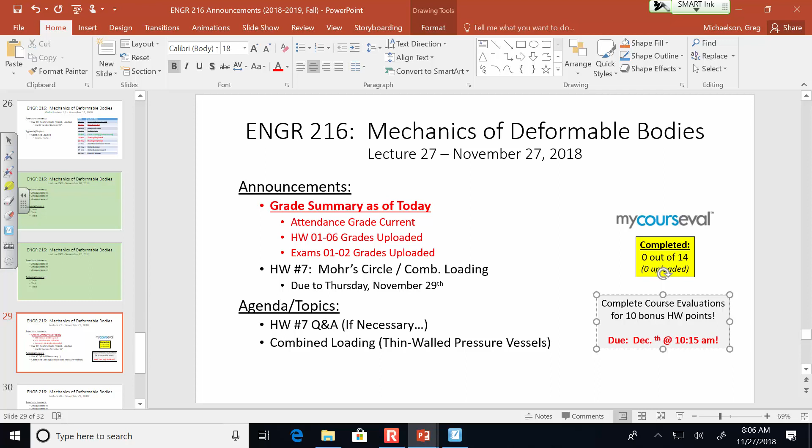Yep, that is correct. It is December, I think December 13th. December 13th. Thank you. That's going to bug me as well.

Okay, so homework number 7 is due Thursday. I'm going to assign homework number 8 on Thursday. It's due the following Thursday, and then that's it. Everybody okay, clear on homework schedules?

Now, as for the exam, it's on December 13th, that's Thursday. I have here due 10:15 a.m., but our exam is at 8, right? I think it's 8, so I'll check. It's in the syllabus. I checked the exam schedule when I made my syllabus, so it should match, because I have one exam Monday at 10:15, and then it's Thursday at 8 a.m. That's when our exam is, so it's Thursday, December 13th.

Okay, so homework 7, homework 8, the exam. Let's talk about this bonus assignment.

So I don't know about other professors, but I take the course evaluations kind of seriously because I like to see the feedback, and I'm always trying to improve.

So I'll give you a story. I told this story yesterday to my structural analysis folks. My first semester here when I taught steel design, I was using PowerPoint slides with a dark blue background, and when you printed them out in black and white, it was gray, a dark solid gray. You take a pencil and write on them, you can't read it because of the dark gray background. So I was looking through my course evals, and everybody was saying you've got to change the background, we can't write on anything. So the theme I use now with the green lines and the Marshall logo, that's why I use it, because otherwise I'd probably still be using that blue background. The point I'm trying to make is I do take this stuff kind of seriously.

We only have one more combined loading scenario to discuss, and that's thin-walled pressure vessels, because they are a special case, if you will.

Let's lay it out. What I'm talking about with a thin-walled pressure vessel is probably, on its face, going to be a more attractive topic for you mechanical engineers in the room, because we're talking about storage of fluids, gases, what have you, at either high temperatures or high pressures. That's a mechanical engineering aspect if I've ever heard one.

There are actual applications of thin-walled pressure vessels in civil engineering as well. For those who take reinforced concrete design, when we look at spirally reinforced circular columns, we size and detail the spiral reinforcement assuming it's a thin-walled pressure vessel containing the column. You've got this compressive load on a column, the internal column wants to crack and burst, and the spiral reinforcement keeps it contained. It's kind of the same thing.

Now, a couple things about this derivation: you're going to see these formulas and they're really simple and straightforward. What we're talking about is a vessel. We assume it's cylindrical in nature, so it's a long, circular tube, and it's subjected to some sort of uniform internal pressure on its inner surface.

One of the things we're doing in our analysis is assuming that the walls of this cylinder are essentially thin. What I mean is you're not getting a variation in response from this side of the surface to this side. In other words, we're basically assuming the stresses and strains are uniform along the wall of the cylinder.

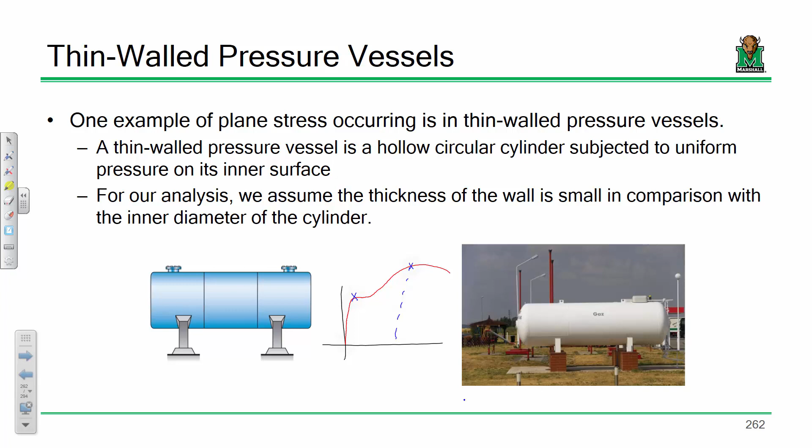Random tidbit, random factoid, but that's all I got. I just think that's kind of cool. It's called autofrettage, if you ever hear about it. So Google it, Wikipedia it.

It's cool stuff. Okay, so what we're doing in this derivation is I'm ultimately trying to determine the stresses on a thin-walled pressure vessel that's subjected to internal pressure.

Now, this is pretty simple to understand conceptually if you think about it. You got a balloon, right? Take the balloon, balloon expands. What type of stress is the balloon experiencing? Think about it. Let me ask it simply: is it experiencing tension or compression? Take the balloon, what happens to the balloon? The fabric of the balloon is being stretched, right?

That's the same thing here. You have a pressure vessel subjected to an internal pressure. The pressure vessel is wanting to expand, but it's not — it's containing that pressure. So it's going to experience some tension. If you look at a stress block in a pressure vessel, here's your stress block, what you end up seeing is here's a sigma 1 and here's a sigma 2. You end up seeing a stress block that experiences nothing but tension. So your principal stresses are really easy to determine.

Once you get sigma 1 and sigma 2, you can determine tau max pretty easily. So that's really sort of the long and short of what we're doing, is we're trying to determine sigma 1 and sigma 2. Okay, so I have here a section of a cylinder, right?

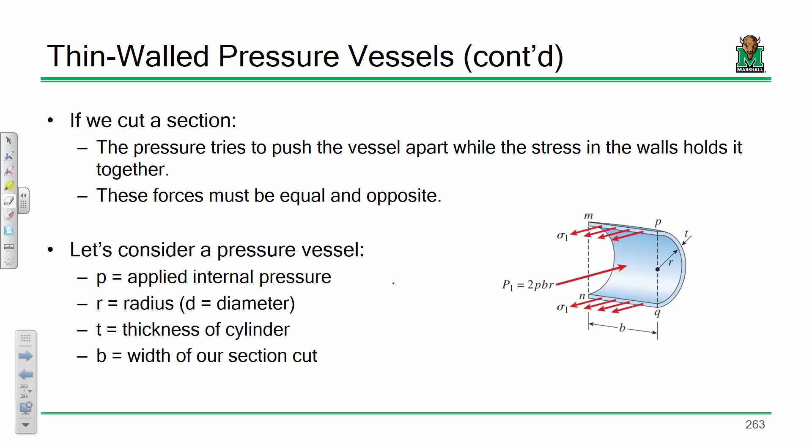Now, for those of you who've had a course in fluid mechanics, or if you've talked about pressure a little bit in any of your other classes, you might be a little confused right now, because if you go back to the balloon analogy, if I blow up a balloon, the pressure doesn't just act one way — it acts every way. You have a pressure vessel or balloon or anything, and you have some internal pressure inside that structure. The pressure is going to act perpendicularly everywhere, because it's going to try and force the whole thing apart.

Well, what I've done in this particular section cut, because I'm trying to determine the amount of stress this way, is I'm cutting a section and I'm only looking to the right. It doesn't matter, I could look to the right or to the left, it doesn't really matter. But the reason why I'm only considering pressure that's acting to the right is because if you cut a section and look to the right, everything that's going up is canceled out by everything that's going down. I've got some amount of pressure going up, some amount of pressure going down, all that gets canceled out. The only thing that doesn't get canceled out in this equilibrium scenario is pressure going to the right.

Well, where does that go? It's resisted by some stress inside the pressure vessel acting to the left. So when I cut a section, all I have to consider is pressure acting toward the right, because that's counteracted by the cylinder generating stresses to the left. Everything going up and down is canceled out internally. Does that make sense from an equilibrium standpoint?

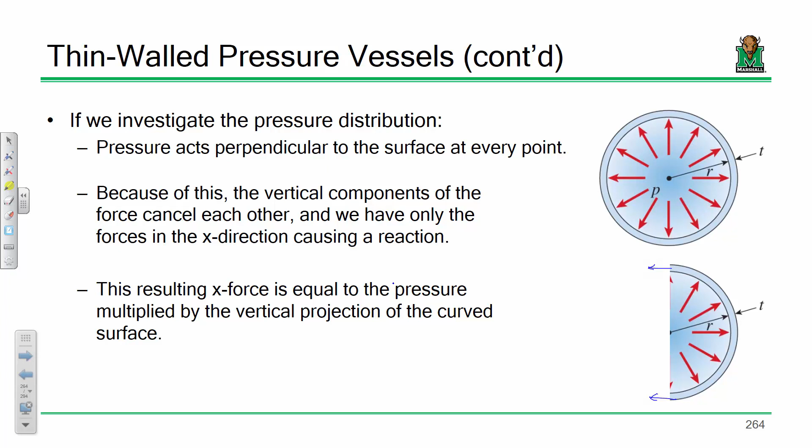But with this, because you have stresses going in all sorts of different directions, we can say everything going up is canceled by everything going down, but that doesn't address things going to the left or right. Sound good? Okay.

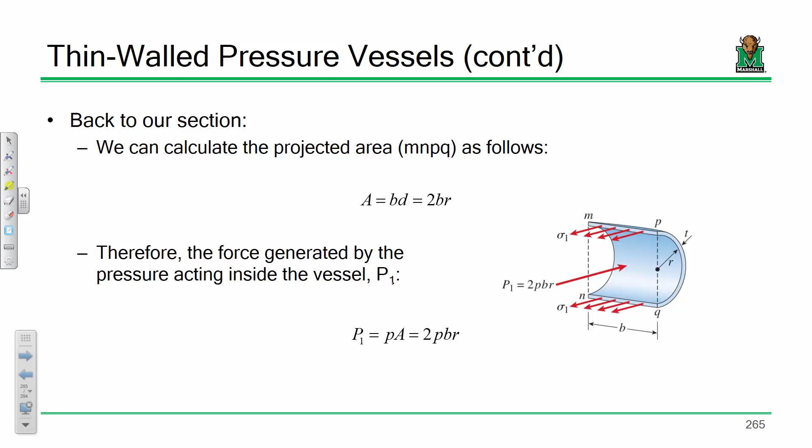Now here's our section. So how do we determine the pressure, the area, and the force? What is this area? Well, this area is the width times the height. The height is 2 times the radius. So this area times the internal pressure, that's the force. Force equals pressure times area. Sound good? So take that force and divide it by the area of the cylinder.

Now what's the area of the cylinder? Well, it's the area of this little metal strip here and this metal strip there. What's the area of that metal strip? Down here it's B times the thickness, here it's B times the thickness, so it's 2 times B times the thickness. Take force divided by area, there's your stress. That's simple.

So I propose that one of our principal stresses is PR over T - the pressure times the radius of the cylinder divided by the thickness. That's simple, I told you this is really easy. This is a really easy formulation. Okay, now that is stress this way.

So let's say here's my pressure vessel. That's stress this way, like we sometimes call it hoop stress. That's stress along the circular direction of the cylinder. But what about this way? There's also stress acting this way. Think about it like this - if I'm subjecting this cylinder to internal pressure, I propose one of two things is going to happen. Not only is it going to want to get wider, it's also going to want to get longer, right? Imagine the clown with the balloon going like this, it wants to get longer. Well, same thing here, okay?

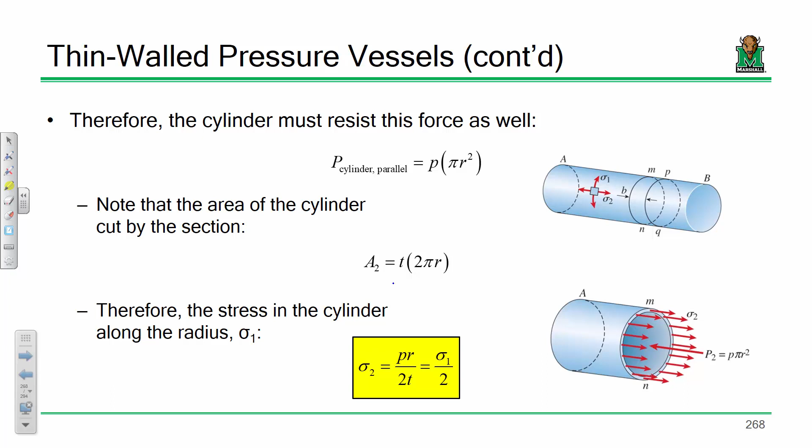Any questions? Okay, let's look at an example.

Our derivation assumes the ends of the cylinders are flat, so it's a cylindrical cross-section. There are derivations you can look up for spherical ends, conical ends, or other shapes - it's not that difficult to find.

Have you ever heard of a Roark's stress guide, if you've worked in the field? Go to any mechanical engineer who's been practicing for 10, 15 years, or even a structural engineer that long, and look at their bookshelf - more often than not you'll find a Roark's stress guide.

A Roark's stress guide is a book about yay thick, and it's got all these different stress formulas for really unique scenarios - like the stress on an angle bracket with a hole in it, or a cylinder with a convex end, something weird like that. There's oodles of tables for stuff like this. What we're doing is fundamental stress analysis, but if you have anything with really weird geometry...

I'd suggest one of two things: if it's somewhat standard, you may find it in something like a Roark's stress guide. Or if it's that funky, break out the finite element analysis - ANSYS, NX, or whatever software package you want - and determine it accordingly. So the short answer is yes, there are derivations for other geometries, but I'm not worried about that here. As long as you understand the general concepts, I'm good.

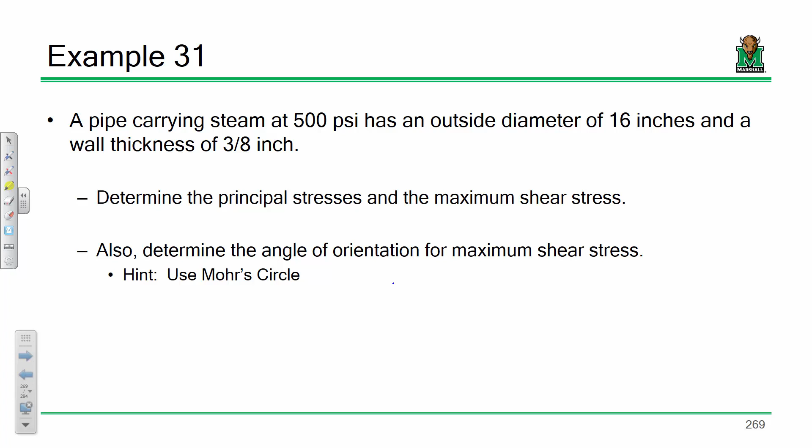Okay, so we have an outer diameter of 16 inches and a thickness of 3/8 of an inch. Right off the bat, how do we determine an inner diameter? Anybody remember? Take the outer diameter and do what to it? Minus 2t, there we go.

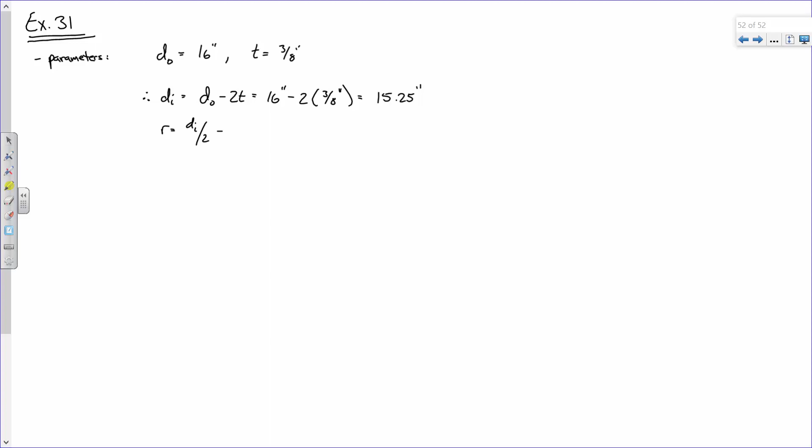Okay, and that comes out to be 15 1/4. The reason we need that is because we define the radius as the inner diameter over 2, so that is 7.625. We also have our internal pressure of 500 psi.

If you have that, you can determine your sigma 1 and sigma 2 very easily. Sigma 1 is PR over T. That's 500 psi, R is 7.625 inches, and T is 3/8 of an inch. What does that come out to be?

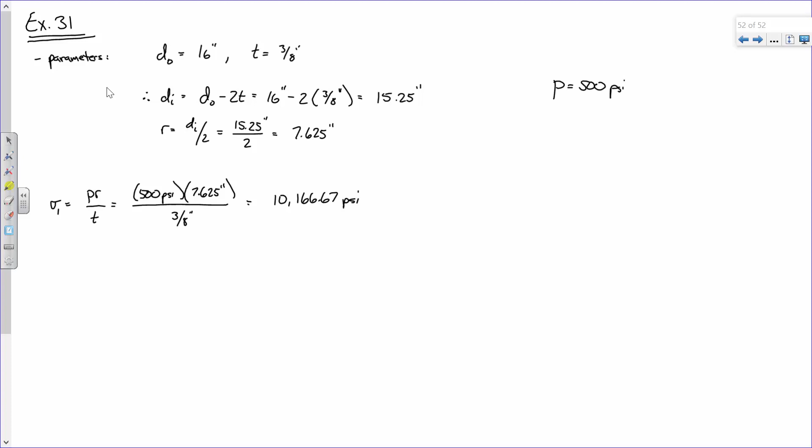There we go. What are the units? It's a stress, so it's PSI. Keep it simple - look, you have PSI multiplied by inches over inches, the inches cancel, so it's just PSI.

Now, I'm lazy, so you could say sigma 2 is PR over 2T, but I'm lazy - that's just sigma 1 over 2. So that's 10,166.67 PSI over 2.

So here's what I propose: for this pressure vessel, we have a stress state where we have a positive 10,166.67 psi for sigma x. We have sigma y, which is 5,083.33 psi. And we have a tau xy, which is 0, because again, it's a pressure vessel - it's like a balloon blowing up.

We're stretching on it, but why am I saying tau xy is 0? Think about it - when you blow up a balloon, is it doing that? No, it's just whoosh, it's just experiencing normal stress.

From these, what can we compute? What is sigma average? How do we do that - remember? Just that plus that divided by 2. The tau xy is the shear stress. So sigma average is 7,625 PSI. Do I have a second on that?

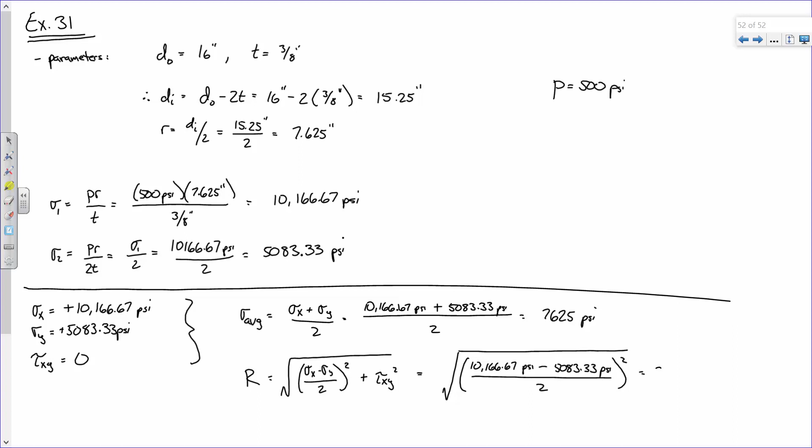Second on that? All right, so from these we can determine a few things. We can determine sigma 1 and sigma 2. Some of you might have a little bit of a confused look on your face, and that's a good thing. And you'll see why.

So what is sigma average plus R and sigma average minus R? What's the first one? What about the next one? There you go.

In other words, our derivation - and I sort of wanted to wait until you saw it - but when we derive these right here, these are principal stresses. And I'm going to put a caveat on that: if no other stresses are present.

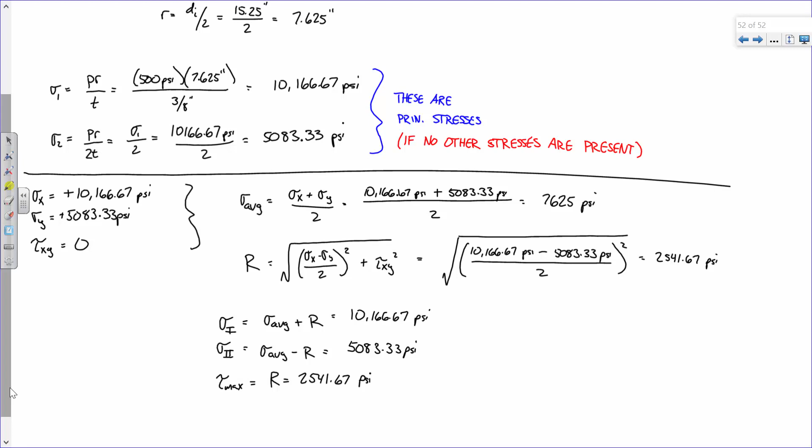Now the only other thing left to determine on this problem is your principal orientation. Does anybody remember that formula? Well, you've got your notes.

There you go. Now, without doing any math, tell me what that comes out to be. Well, you have to do a little bit of math - you can probably do it in your head. What is tau xy? So what's the inverse tangent of 0? 0.

Boom. Again, when you have a pressure vessel, go back to the balloon scenario. When you blow up a balloon, is it doing that - is it like shearing? It's not. Anytime you have a pressure vessel, if all there is pressure, you're going to have a sigma x and a sigma y, but no shear.

No, I'm saying what if you took the cylinder and twisted it, or sheared it? Then you'd have a shear stress. Which is possible - imagine you've got the clown blowing up the long balloon. Then you take that balloon and you twist it. Now that balloon is subjected to shear stress.

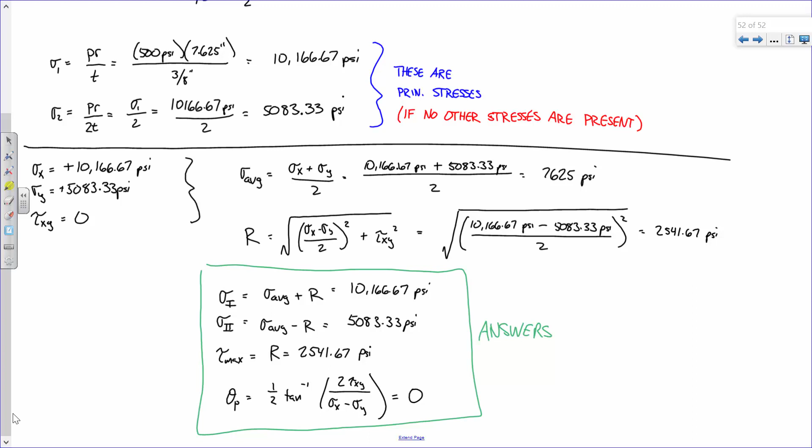Any other questions? So I guess if it's a cylinder, does it really matter if the angle is different? Like if it's a cylinder, at principal angle, it doesn't matter what it is, right? It only matters if you're using a material that has a particularly weak capacity in shear.

It's possible. Look, you look up a material - let's say you're using some grade of aluminum, and that might have an allowable normal stress and an allowable shear stress. So depending upon what those values are, these may be fine, these aren't. That's what I'm saying, it just depends on the material you're using.

Did I convince you? I feel like I didn't. Well, I'm talking about the angle, not necessarily the PSI, like that principal angle of orientation. It would only - all right, how about this, the best way of answering that is: if you had other stresses, then you would need to determine that angle. I'm saying if all you have is internal pressure, then the answer to your question is mostly correct, yes.

But if you have a shearing or a torsion or a bending or something, then that angle isn't going to be zero, because you're going to have these values not necessarily be these, and then you might have a shear stress. Sound good?

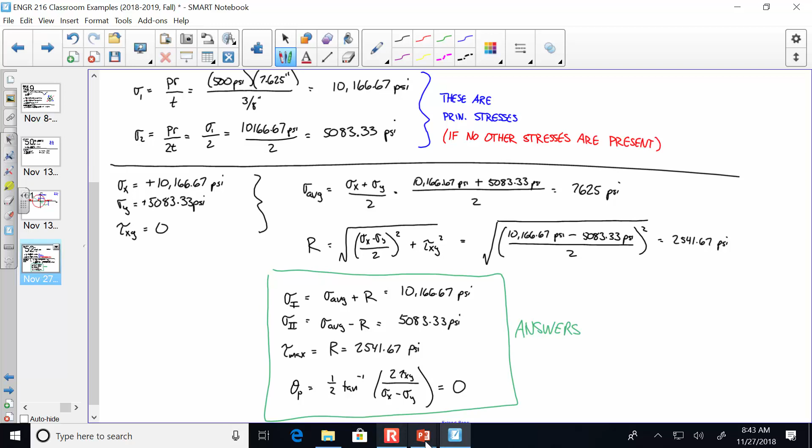All right, since we got time, I'm going to use that time. We're going to talk a little bit about our last topic, and here's why. I'll make you a deal: if we can get through buckling today and Thursday, we'll cancel class on Tuesday.

Are you sure? I'm sensing some doubt. Let's talk about buckling.

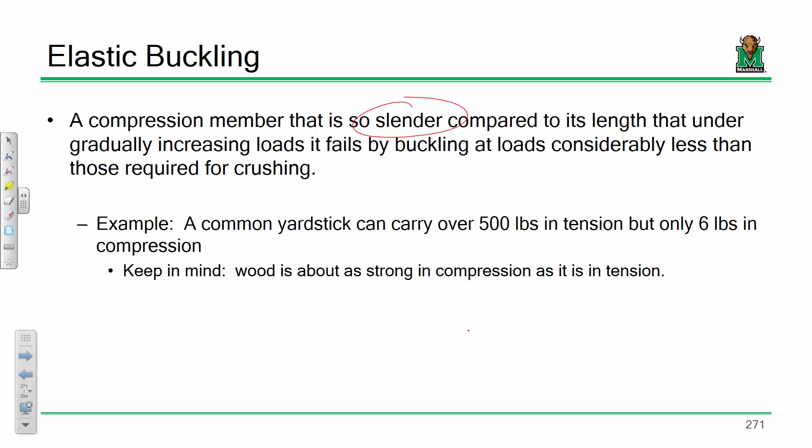For you civil engineers taking steel design with me next semester, the concept of slenderness is something we're going to spend a long time on in steel, because how you handle slenderness in different directions—you've got to hike up your pants and know what you're doing.

Now, stability-related failures can happen for a number of reasons. For instance, thin-walled cylinders subjected to external pressure. What if you have a thin-walled cylinder subjected to pressure externally? How many of you have crushed a Coke can? That's what we're talking about.

What about compression flanges in beams? What if you're talking about a beam that's being bent? Anytime you have a beam, some of it's experiencing compression and some of it's experiencing tension. So maybe the beam will want to buckle.

This is just a few, but there's oodles and oodles of different ways that an element can buckle. Sometimes if you're doing just an elastic stress analysis—how many of you mechanicals did stress analysis with NX? Did you all do that? You built a part and then ran the stresses? Well, you run a stress analysis, or for you civil engineers, if you run a RISA analysis, all it's doing is just giving you...

...the compression in this truss member and all this, but it doesn't answer whether or not that member is going to buckle. So the stress analysis we've done up until this point will give you stresses, but it doesn't consider the concept of buckling. Considering buckling, you can have a much worse scenario. The stresses can be a lot worse.

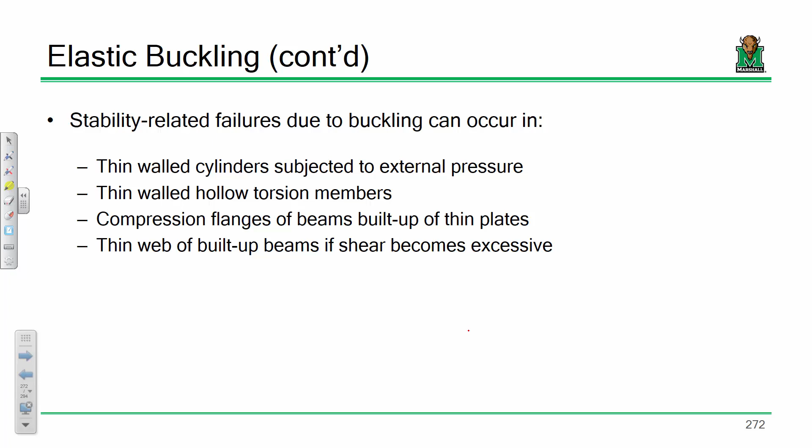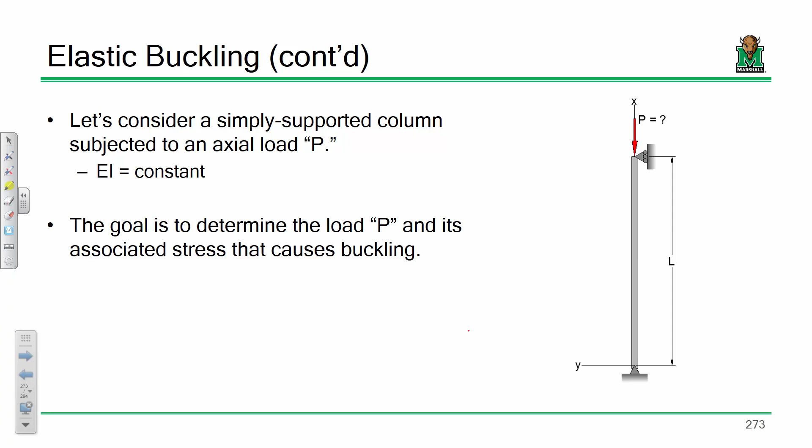So I have some compressive load on it, and I want to determine what load will cause it to buckle. I propose that when it buckles, it's going to look something about like that. First off, it's going to bow out. Second, if I've got P going down, I've got P going up. So that's really the only difference here.

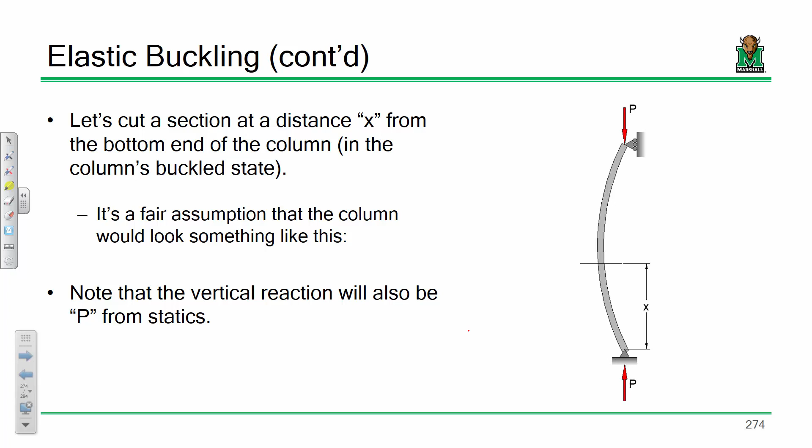What I'm going to do is break out my samurai sword or lightsaber. I'm going to cut a section at some distance X. I'm going to say, well, what have I got going on in this section? If I look down, if I've got P going up, I've got to have P going down. So right off the bat.

And then what about my moment? This is basically like a beam. There's going to be some internal moment inside the column. So how do I determine that moment? If I sum moments at the cut, what do I have? I have some internal moment going this way. Don't have to consider that, but I've got P times Y, Y being however far the column is bowed out. So this moment has to equal minus P times Y. Sound good?

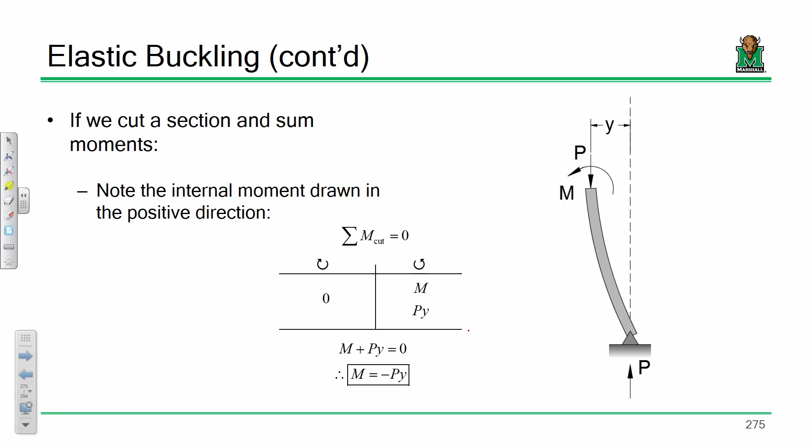Now, that Y is not just some innocuous term. That Y is deflection. Remember this? The second derivative of deflection is M over EI, or Y double prime is M over EI. Y'all remember that? So if we have our expression M is minus P times Y, that's what I got from the previous slide, and I know that Y double prime is M over EI, I can substitute and get this.

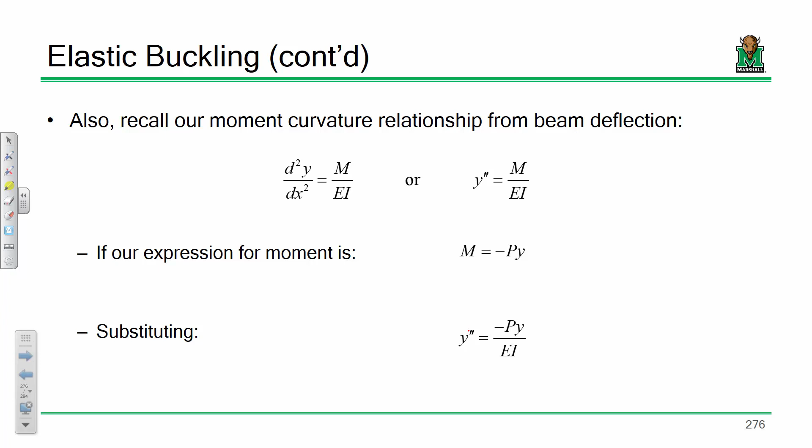Rearrange it a bit. Put everything onto one side, and then to make the math simpler, what I'm going to do is call this term alpha squared. You're going to see why here in a second. Take this term, call it alpha squared, and I get this. That is a second order differential equation.

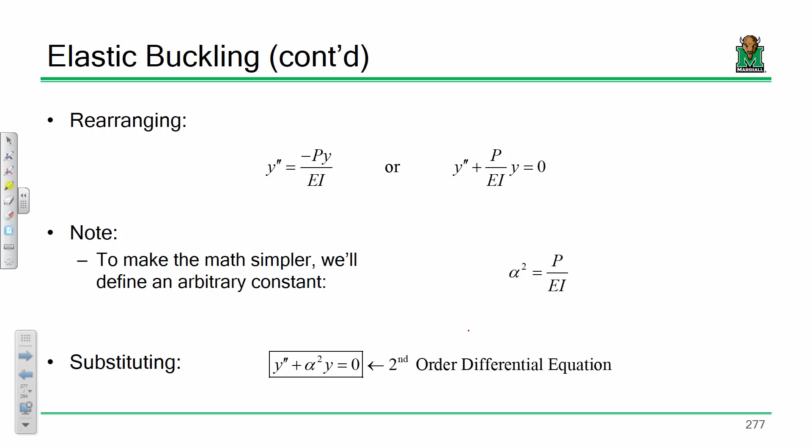So now we have to solve a differential equation. I'm going to use the most popular method that college students utilize to solve differential equations. Acting like I don't know things. I know things. We don't do this, Dr. Mike. We don't know what you're talking about.

So Y double prime plus alpha squared, and there it is. I'm joking. I'll show you the real way that you would do this.

But I have a second order differential equation. The reason why I called that term alpha squared is because this differential equation, Y double prime plus alpha squared times Y, is a very common differential equation. It's one of the most common differential equations that you learn to solve when you take Math 335. The solution to that equation is an arbitrary constant times the cosine and an arbitrary constant times the sine. The reason you call this term alpha squared is because your solution has C1 times the cosine of alpha, C2 times the sine of alpha.

If you take Math 335, you will learn the method of characteristic equations. You take your second derivative and call that r squared. Your first derivative becomes r. Your term would become a constant. So you take this differential equation and turn it into a quadratic equation. You solve for r, and you get r is plus or minus alpha i, because that's imaginary. Anytime you have imaginary roots, your solution will be y equals c1 times the cosine of alpha x plus c2 times the sine of alpha x.

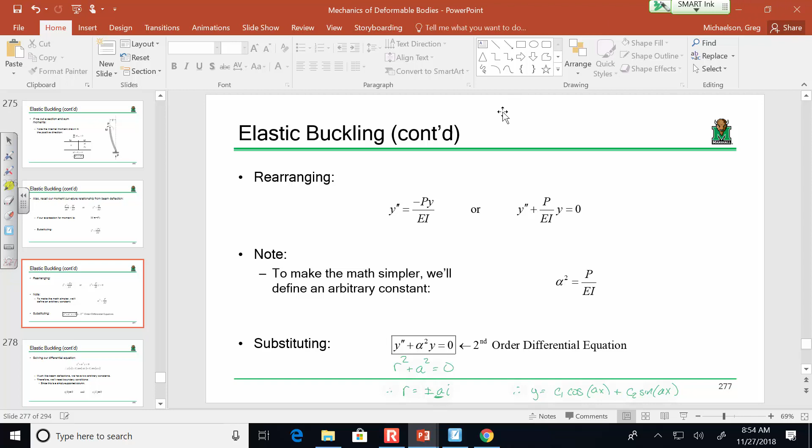Okay. So when you solve your differential equation, you're going to get the following solution: you have C1 times the cosine of alpha x and C2 times the sine of alpha x. Remember, alpha is the square root of P over EI, just keep that in mind. Now, when you have unknown constants, you have to solve for those constants utilizing boundary conditions. That should be familiar because we did that for beam deflections, right?

Remember, when you have a beam deflection, you get two constants. How do you solve for them? Well, if it's simply supported, you know that the deflection over here is 0 and the deflection over here is 0, right? It's no different. We're going to do the exact same thing.

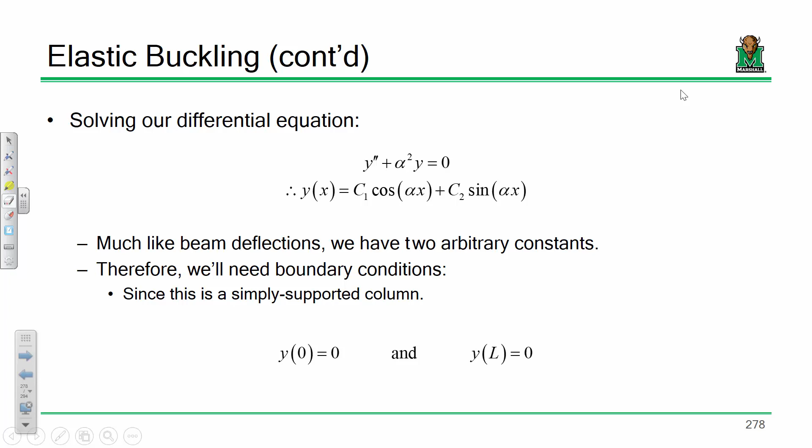Since this is a simply supported column, I propose that the deflection at x equals 0 is 0, and the deflection at x equals L is 0. So let's take these one at a time. Let's take the first one.

Utilizing the first boundary condition, plug in 0: C1 times the cosine of 0, C2 times the sine of 0. What's the sine of 0? That's 0. What's the cosine of 0? That's 1, right? So I propose that first constant is 0, and that simplifies my equation a little bit, right?

Now, what happens here is if I plug in x equals L, I get this. That's not what I really wanted. I wanted a nice, pretty little answer, like here's C1 equals 0. I didn't get C2 equals something. I got this. What do I do with this?

Well, we got to put our thinking caps on. We got to think about this a little bit. We have C2 times the sine of alpha L equals 0. Ignore all the mechanics and the buckling and whatnot. Let's just use some common sense. How can this equation be 0?

I'll give you an example. Could this equation be 0 if L was 0? What if L was 0? Would that be true? What's the problem with that physically? If L equals 0, the column doesn't have a length. So that doesn't make any sense, right?

Could alpha be 0? Alpha could be 0, but what's the problem with that? What is alpha? Remember, it's the square root of P over EI. If alpha equals 0, that basically means we don't have any load on the column. So it can't be that, because that means we have a column of no length, and it can't be this because we don't have any load on the column.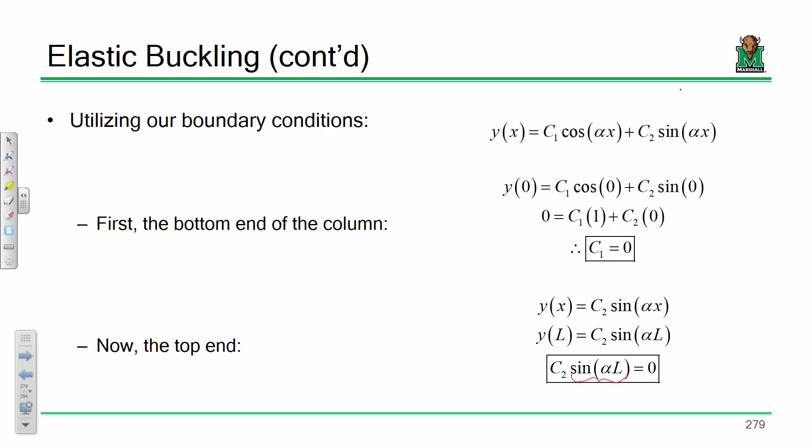But what about the whole sine function? If the sine function is 0, that equation would be true, right? Think about that for a little bit. What we're talking about here is what's called trivial solutions. You can't have an L equals 0 solution because that indicates the column has no length. You can't have an alpha equals 0 because that indicates the column has no load.

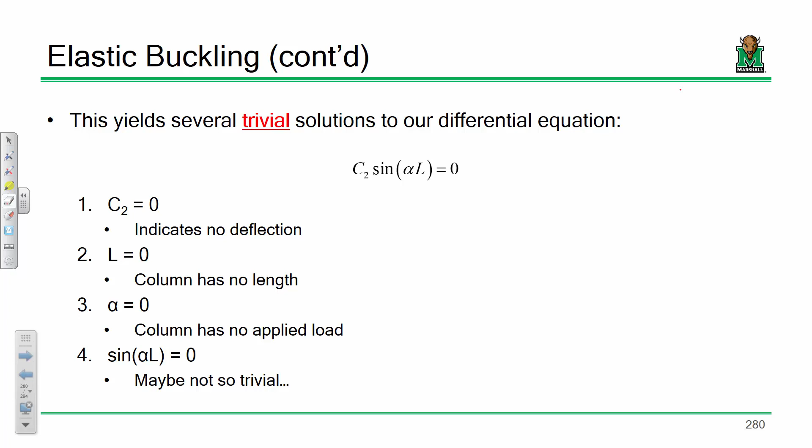But this sine function, maybe not so trivial. What does the sine function look like if I plot it out? Doesn't it look something about like that? The sine function doesn't equal 0 everywhere, right? It only equals 0 at integer multiples of pi. It equals 0 at pi, at 2 pi, at 3 pi, at 4 pi, and so on.

So I propose that the only non-trivial solution to this equation is when the term alpha L is n pi, n being an integer — pi, 2 pi, 3 pi, 4 pi, what have you. So the only way this equation makes any physical sense is if alpha equals n pi over L, where n is an integer.

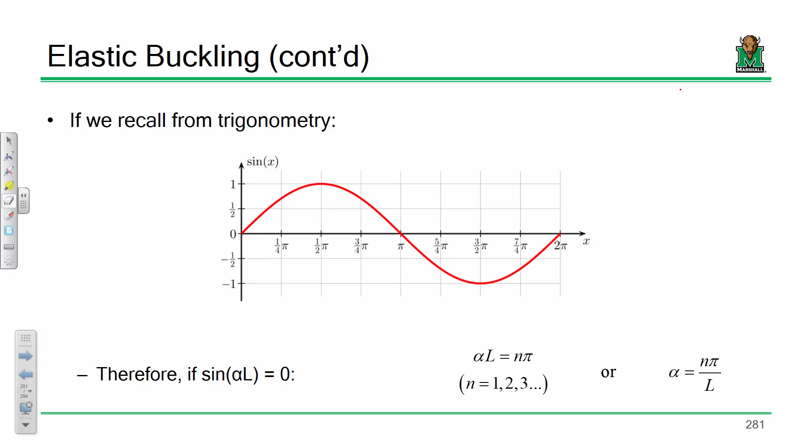Alpha squared is P over EI, so this term's got to be P over EI. Plug and chug — what am I solving for? I'm solving for P. Why? Because that's what I'm after: how much load causes it to buckle. That's what I'm after, I want to know what P is. And so I solve for P, and I get this.

Well, what is that a function of? It's a function of pi — pi is easy to calculate — E, I, L squared, and then n being some random integer. What do I do with that? Well, let's just look at this.

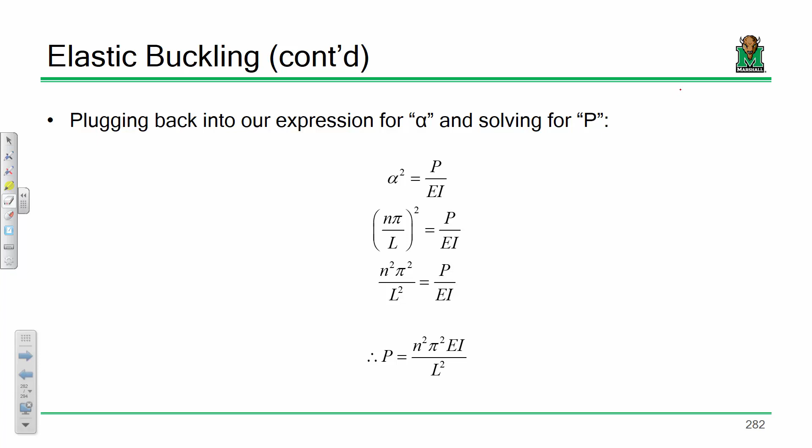N is an integer. So I propose I get a different buckling load for each value of n. However, we're going to find that only one of them really matters. But just so everybody's clear, we now have an expression for what the deflected shape of the structure looks like and what's the critical buckling load. If I plug in an n value of 1, I'm going to get a buckling load. N equals 2, another buckling load. N equals 3, so on and so forth.

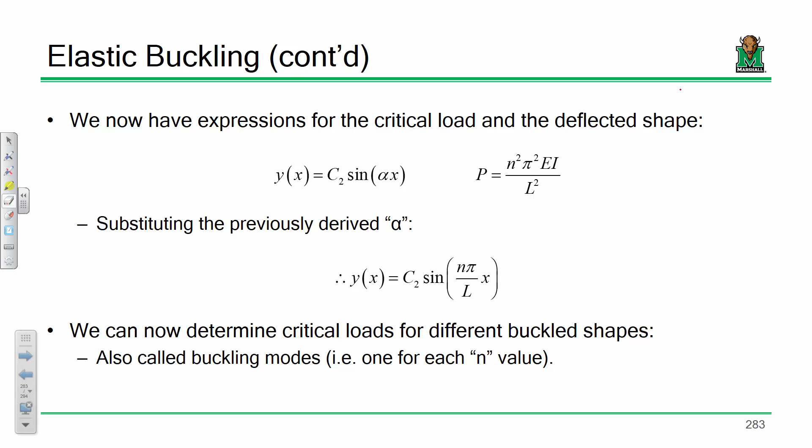So here's what that looks like. If I plug in n equals 1, because it's n squared, I get pi squared EI over L squared. If I plug in n equals 2, I get another one, n equals 3, so on and so forth.

Now let's just keep this simple. I got the yardstick in my hand. I'm pressing on it. What does it look like when it buckles? Does it look like this? What does it look like? This one, right? Look at the loads.

In order to generate this mode of buckling, I got to have a load that looks something like this. This is 4 times that much load. I'm pressing on the yardstick, and as I'm pressing on it, I'm going to hit that before I hit that. So what's the only buckling load that matters? That one. That is the only one that matters.

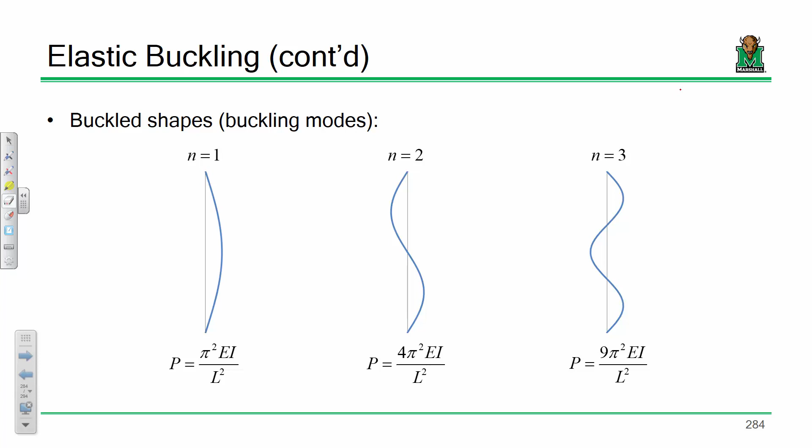So I propose to you that the critical buckling load for a pin-pin column is pi squared EI over L squared. That's an important parameter. That's one to star in your notes. I'm going to modify it a little here in a bit, but you'll see why. Sound good?

Now, that is a critical buckling load. This is mechanics of materials. I would like to determine a critical buckling stress. Now, critical buckling stress, if I'm taking this column and pushing on it, I propose that critical buckling stress is P over A. So take this and divide it by the area. When I divide it by the area, I can pull out that term in parentheses. That term in parentheses is a section property.

Let's go back to our discussion of section properties. Remember we had areas, J values, and section moduli and moments of inertia, and they were all functions of what the shape looked like. Well, this I over A is also another section property. We have a special name for it. We call it the radius of gyration. Specifically, it's the square root of I over A.

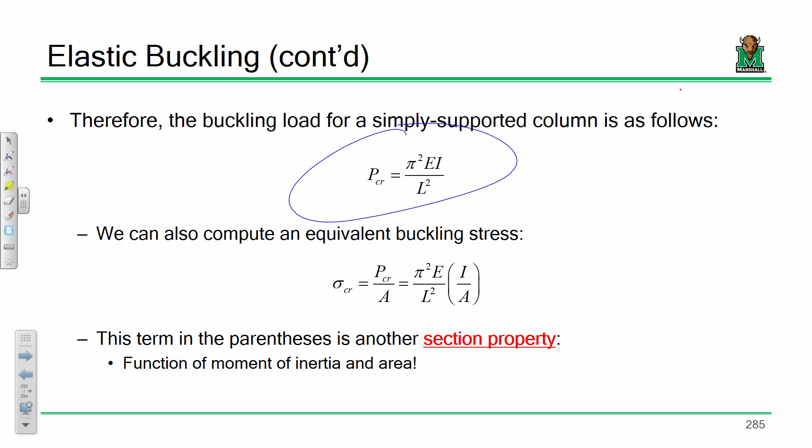It's the square - no, we're defining a new section property as a result. There's a reason why we define it in this term, and it's going to become very clear here in a second. If you rewrite this equation, this I over A is R squared, so you have R squared over L squared. You can rewrite this as L over R. This term L over R, first off, is unitless, because the member length will be so many feet and the radius of gyration will be so many inches. So you can do a unit conversion to get that to a unitless quantity. It is a very explicit parameter in buckling.

And it's the slenderness. It's our mathematical way of defining how slender a member is. For instance, if you compute L over R for a drinking straw and compare that to L over R for a can of Campbell's tomato soup, you'll find the L over R for the drinking straw is much higher, because the can of tomato soup is a much more compact shape than a drinking straw. We express that through a unitless quantity called slenderness. The more slender a section is, the more susceptible it is to buckling.

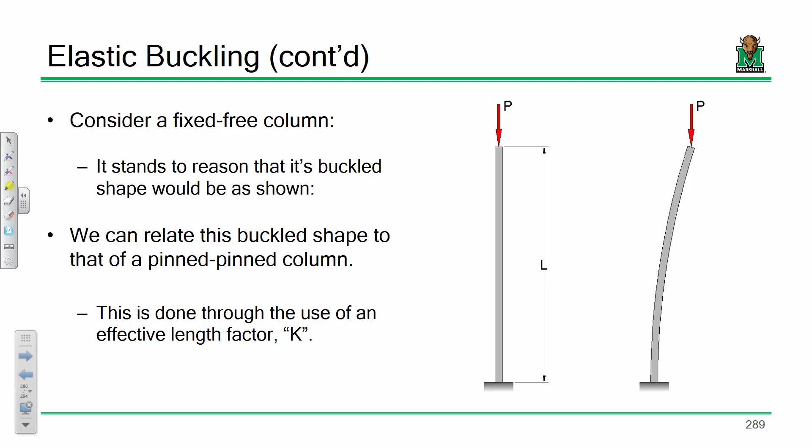I'm going to hold off because I don't want to information overload you, and we have plenty of time to complete not only these series of notes, but we have two examples at the end, and we can handle that pretty easily in class Thursday. I'm going to stop for today, okay?